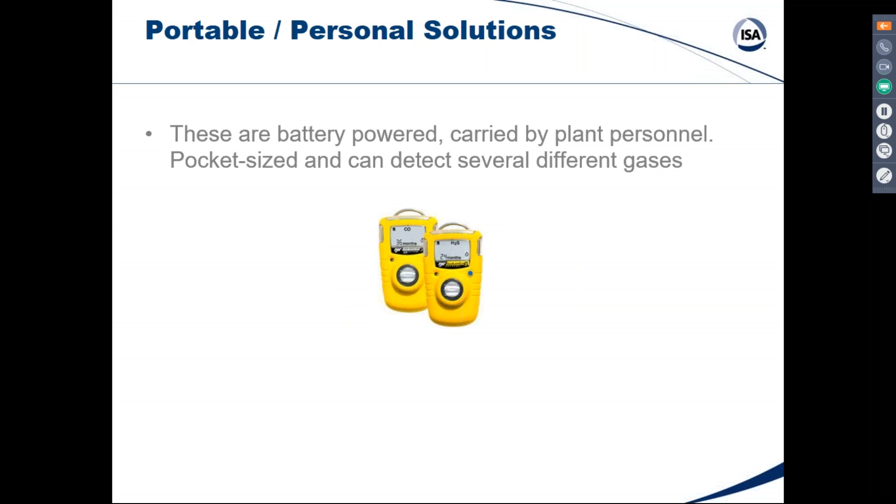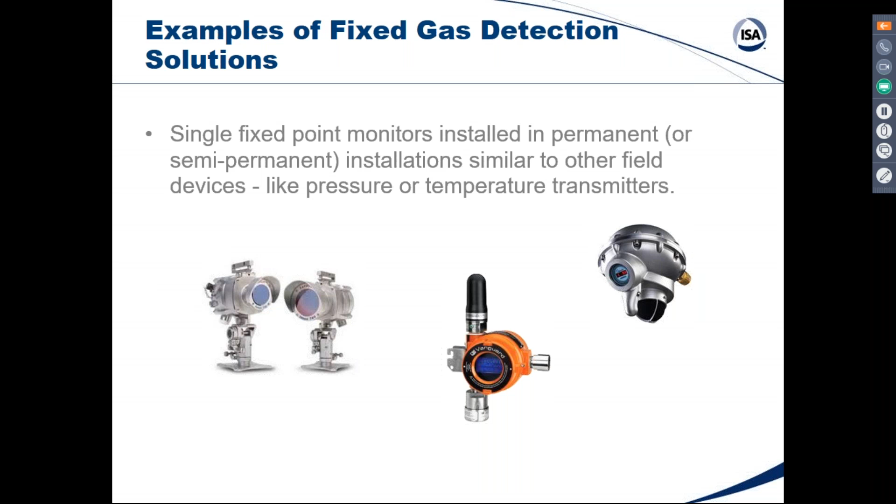Some examples of fixed gas detection, which is what we're going to focus on, are shown here. So single point fixed monitors are usually installed in permanent or semi-permanent locations. And like the existing pressure and temperature transmitters, they have a single purpose to measure a process variable, very local to where they're mounted. Here's an example of an open path detector, which is designed, unlike the fixed point, to cover a wider area. But by that nature, it's not as effective at point gas detection. And of course, the gas concentrations that it's detecting can be affected greatly by the environment, including weather conditions.

Ultrasonic gas detectors are designed to listen for gas leaks, usually mass kinds of events where there's a noise generated by the leak. And these detectors are really looking at the volume of that gas, not trying to get down to measuring the gas concentration. And these tend to be fairly expensive devices, and certainly more expensive than fixed gas detection.

All right, we'll get back to now the point detectors. So these are placed in areas where gas emissions are most likely to occur. There may be areas where there is wired gas detection present already. The gas has to come in contact with the sensor itself. So these are vertically oriented always. And that's an example of a point gas detector. And further, an example of a wireless one that's now come on the market.

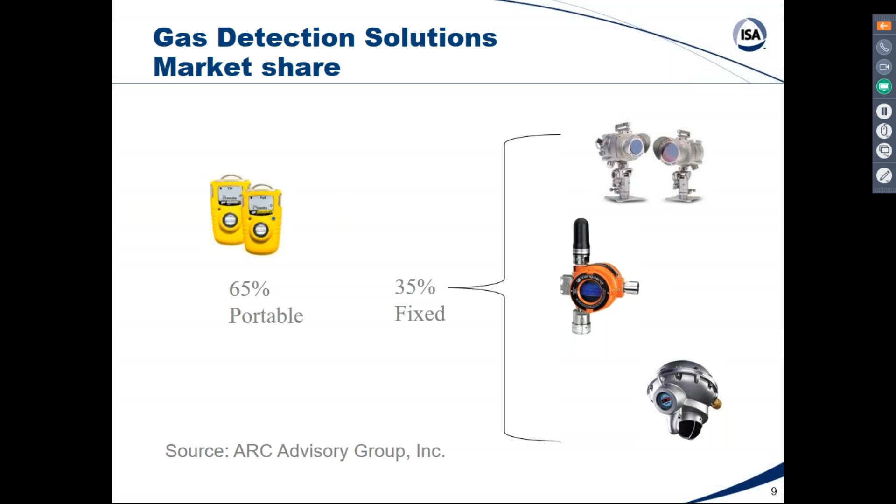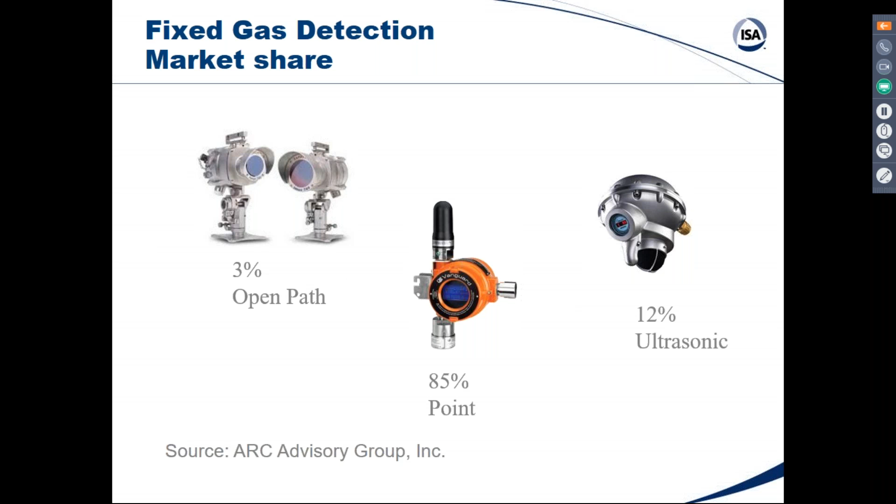So in terms of the market share, 65% are in this portable category, and about 35% make up the rest of those examples that we talked about. And breaking down the fixed gas detection market share, it's dominated by the fixed point gas detectors in this class, 12% in this ultrasonic area, and 3% of the open path type. And as it is now, only fixed point gas detection is available in this wireless type of configuration. The others, well, they're all power-hungry devices, but certainly the fixed point gas detector is less power-hungry, shall we say, than the other examples that I gave. And as such, it lends itself to a wireless solution, battery operated.

I'm sorry, I'm stepping in front of you.

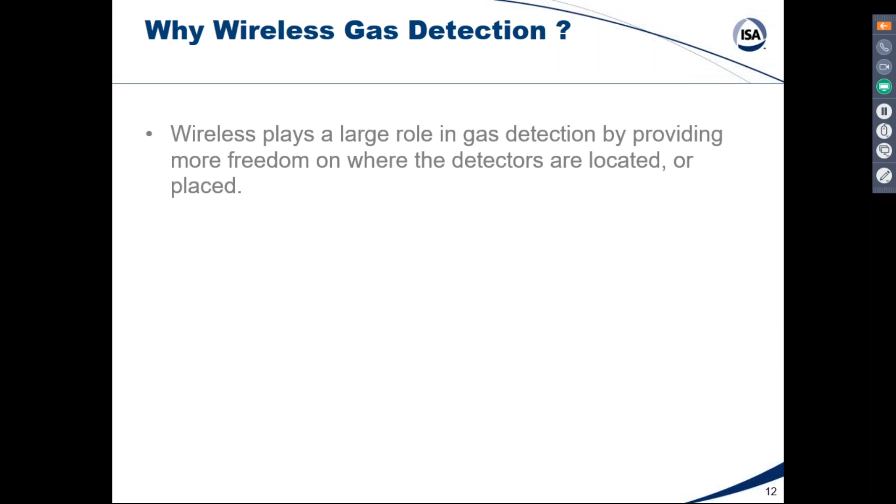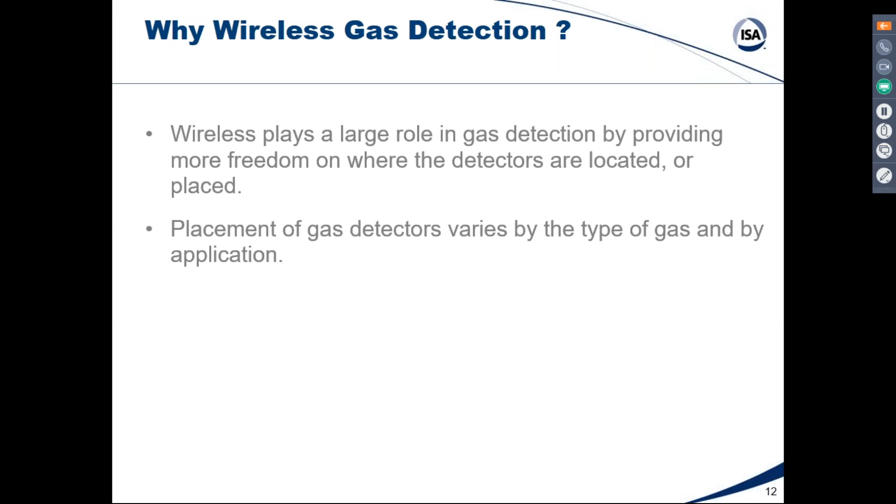So here's a question: why wireless, right? Wireless plays a large role in providing that freedom to locate a detector in oftentimes a hard-to-reach place or an inaccessible location. Of course, the placement varies by the type of gas. It also varies by the application, which is to say, is it an area where there's a high risk to personnel, or is it more likely to be an area where there's a larger risk of explosion?

What are we dealing with? We're dealing with methane, for example, CH4, that's lighter than air and tends to collect at higher locations, right? So you can imagine the ceiling of a garage where a CNG vehicle may be operating, just as a real-life example. Enclosed spaces become high-risk locations where there may be methane present.

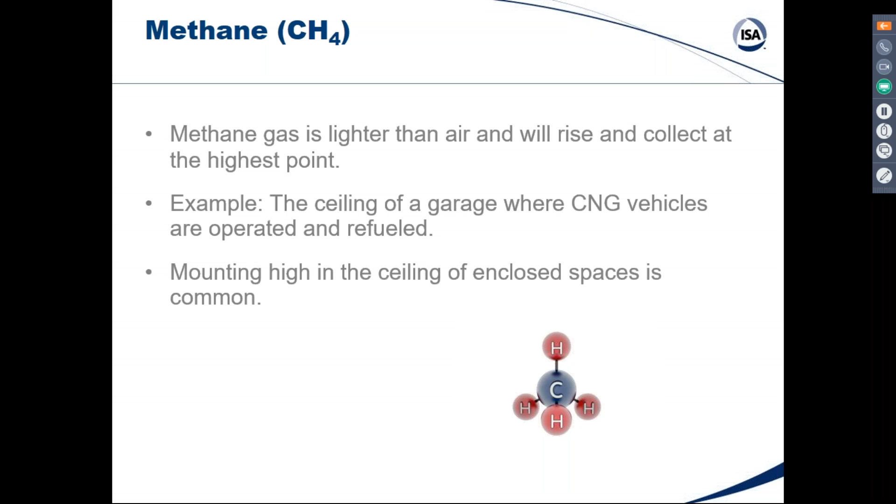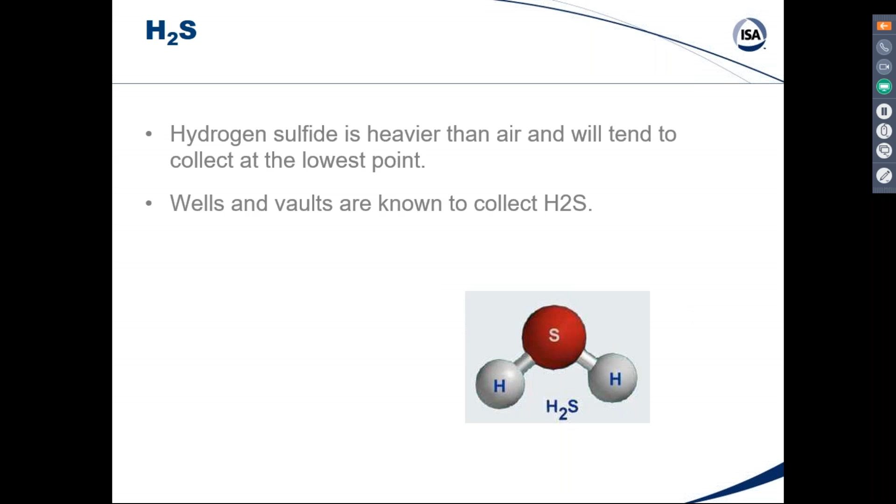And the other biggie is H2S, right? Hydrogen sulfide is heavier, in contrast, than air, and will collect down in lower areas. And this is dangerous, right? Because it lurks around, it can move around depending on the weather conditions and the air flow. Wells and vaults are one of the areas where H2S collects.

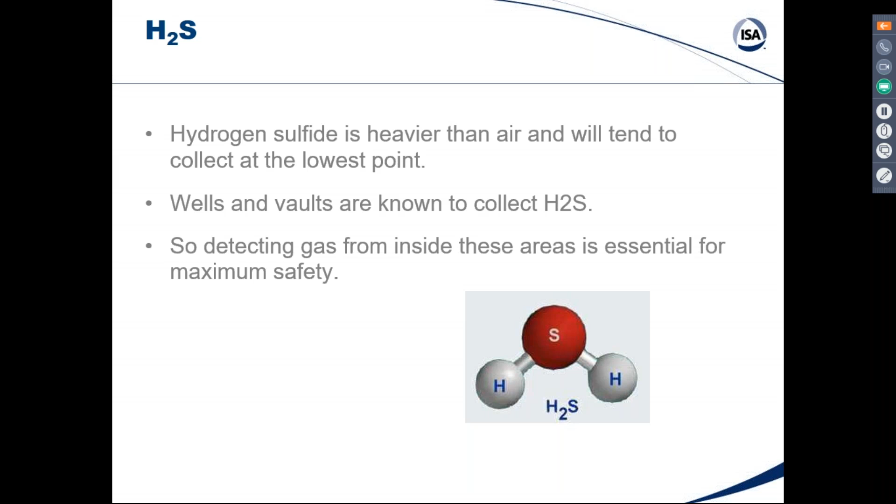So detecting gas from inside those enclosed areas is essential so that an operator, a maintenance person doesn't walk into the space unaware, because it can be fatal very quickly. Analyzer housings would be one example of that, and we'll get back to that in a little bit.

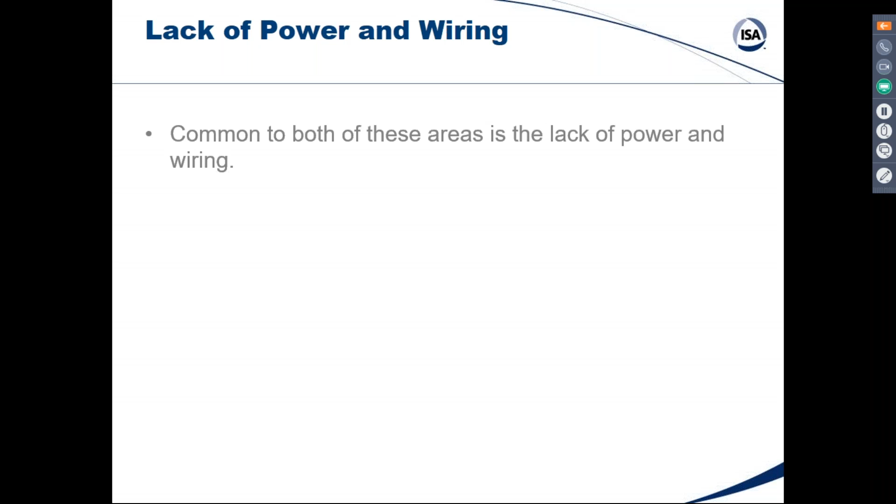So the issue that has plagued wireless gas detection, right, is this lack of power and wiring. These field devices have to transmit their measured value to a host system, a monitoring station, and it's accomplished easier with pressure, level, temperature, because the sensors tend to be a little more forgiving in terms of battery or power consumption.

And so the big trip point for wireless gas detection has been how do you power it in a way that makes it practical to deploy for periods of time, because you don't want maintenance folks having to change batteries, right, every 3 months. That's a big cost. It's a big total cost that goes beyond just the cost of the battery.

So we did a lot of research in this area, drawing on outfits like the FieldComm Group and this outfit called Berg Insight. ARC was another company that supplied us data. What they say is that WirelessHART is one of 5 of these global standards. And I've got a list of the others, Zigbee being one, ISA 100 being another.

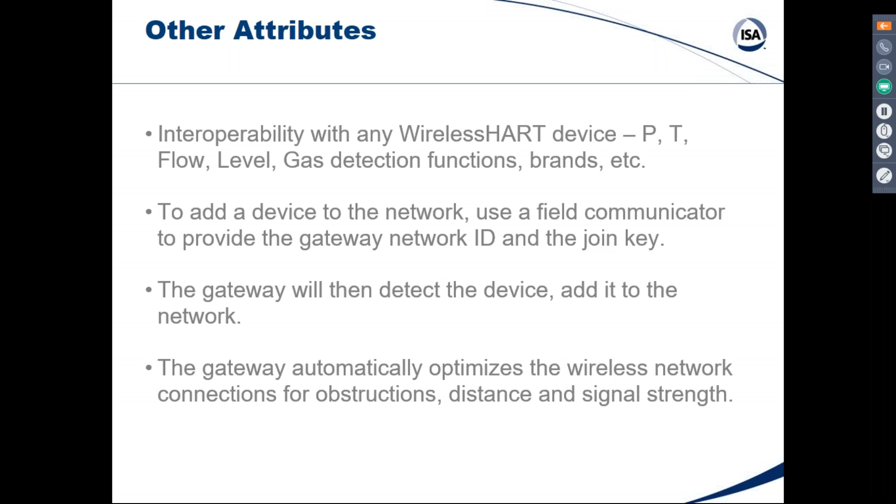So a couple of footnotes, right? In heavily obstructed areas, signal distance can be affected. The point-to-point line of sight feature is about 800 feet. I mentioned the frequency hopping, a way of optimizing that path in the event of interference on one channel. It could be noise. And security is built in.

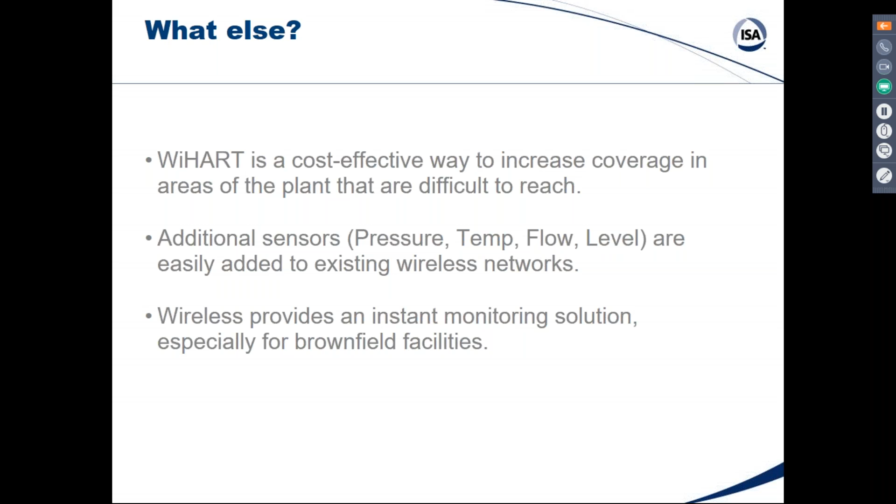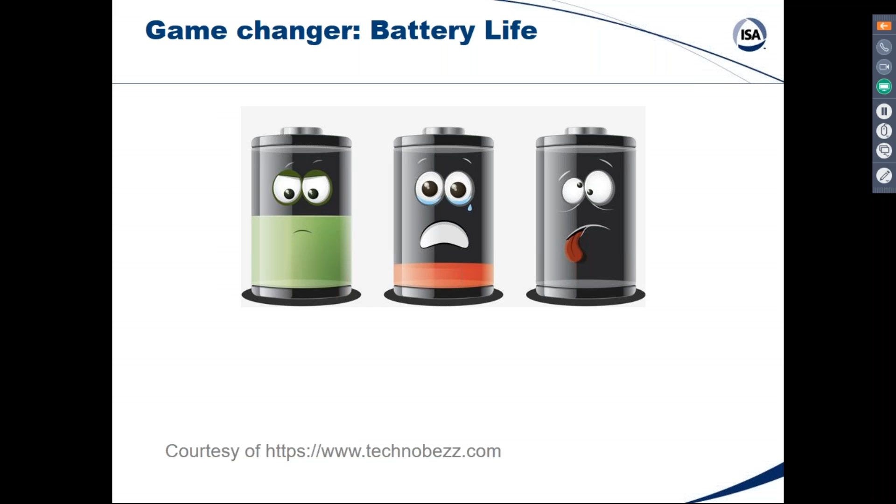Now, battery life has really been one of the trip points, right, for wireless HART gas detection. And we've changed that game, or vendors have changed that game, by breaking through this barrier of short battery life. And I can't go into the details of how vendors do it. I know how we did it. It's proprietary technology that actually some of our earlier products have taken care of as well. The idea of being able to use so little power to get functionality out of a device like a pressure transmitter or a temperature transmitter.

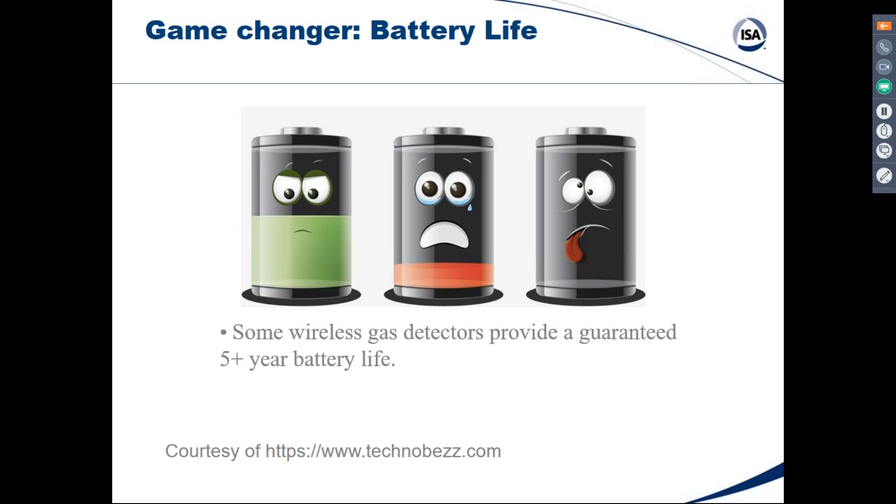And so in summary, we've come from proprietary to open systems. We've come from a situation where there was a fairly costly initial investment in wireless infrastructure to being able to take advantage of existing wireless infrastructure. Come from limited battery life to 5-year battery life that's warranted. Devices with limited diagnostics to expanded diagnostics, a long deployment period to shorter deployment, a steep learning curve to a more forgiving understanding of all of this and using the available expertise to take advantage of these solutions.

And finally, from a system that was somewhat difficult to maintain to an easier way of maintaining it, simply because we've advanced in terms of what we understand. The operators have advanced in terms of what they understand about design considerations and in wireless networks, pinch points and battery life and things like that.

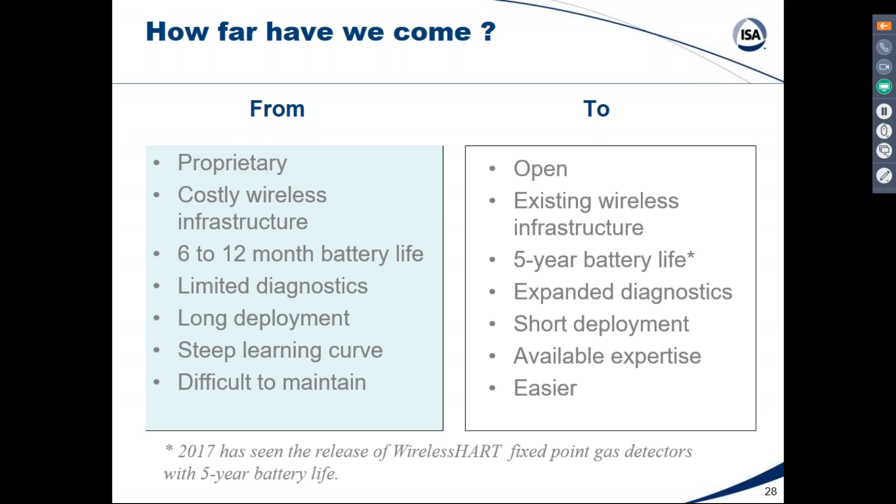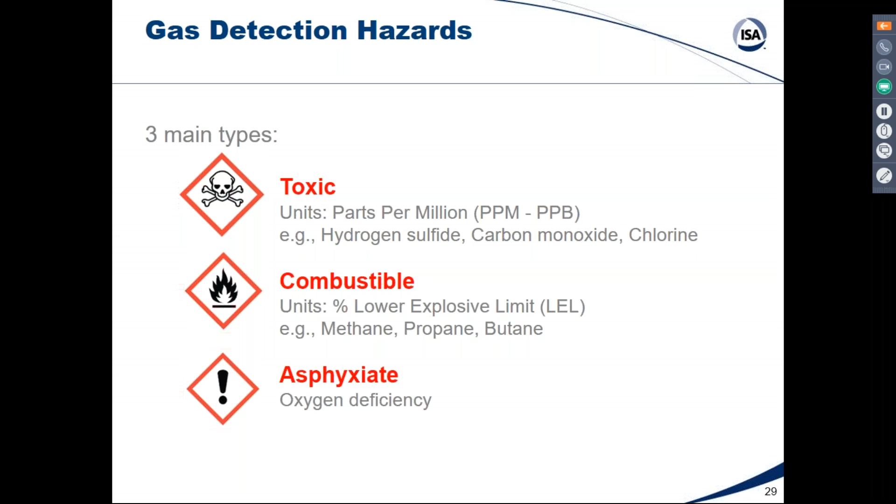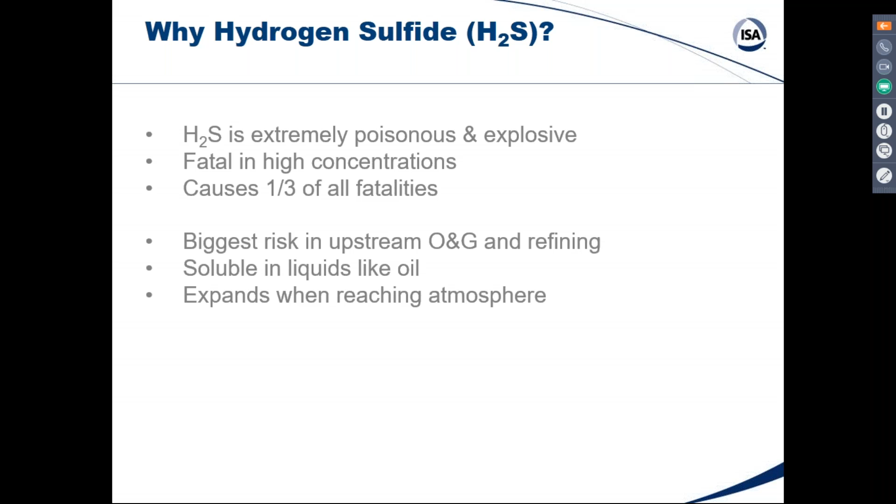So we looked at which gases to roll out sensors for first, and our research said hydrogen sulfide, because it accounts for so many fatalities. It's fatal in high concentrations. It can be fairly low concentrations. I mean, the alarms that majors set oftentimes for hydrogen sulfide are down in the 10 ppm area. It's a big risk in upstream oil and gas because H2S is soluble in oil.

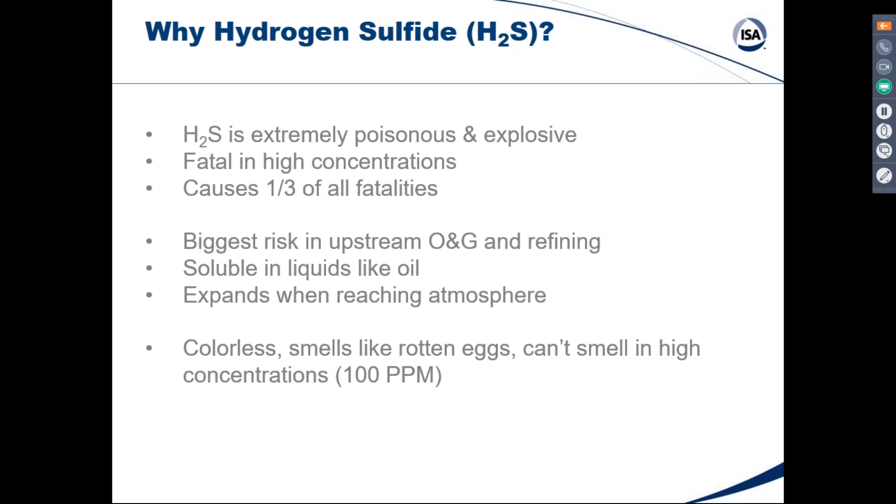And it's colorless. It smells like rotten eggs in low concentrations, and then by the time those concentrations increase to the point where they become fatal quite quickly, your sensing abilities diminish significantly. The olfactory mechanisms in the human get compromised very quickly at higher levels of H2S. And by the time that happens, it's too late.

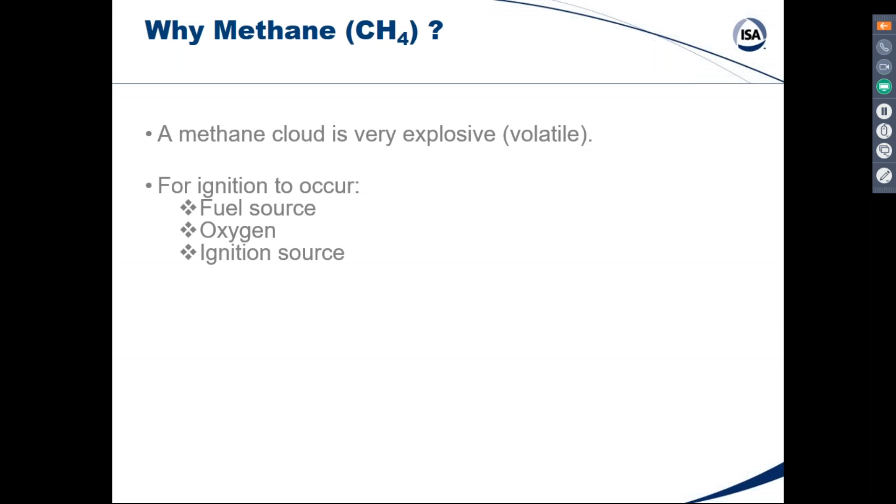Methane, there are examples on the internet of methane cloud explosions. They're all over YouTube. All you need is an ignition source and oxygen. And when we researched which gases really to attack first, it was these two, hydrogen sulfide and methane, making up a large percentage of the problem.

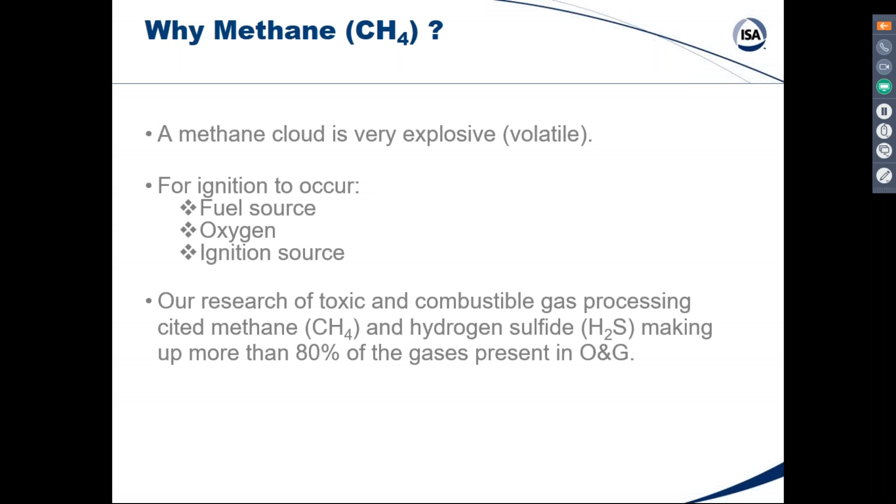Again, this is sort of centric maybe to the oil and gas space, and there are other of course risks that exist in chemical mostly. Some of the pervasive problems: the costliness of installing wired detectors, the fact that infrastructure is sort of maxed out in many locations, can't be expanded. It can take months to trench and to lay conduit and to install panels and all those things associated with wired hardware.

The proprietary wireless has been sort of pushed to the side somewhat by these open standards, at least among major operators. They don't want to deal with proprietary systems. The meeting I had last week, for example, that was the first thing they said: we won't look at any proprietary protocols in terms of wireless. The unavailability of line power.

Other customer problems that we've uncovered: personal detectors sometimes aren't accurate. They alarm locally, but not remotely, oftentimes. And in those situations, by the time you can get help to the guy that's fallen down, it's too late. They're worn by individuals, of course, so the detection happens where the human is present. And that is not everywhere all the time. So a lot of the infrastructure can't be covered with a personal detector.

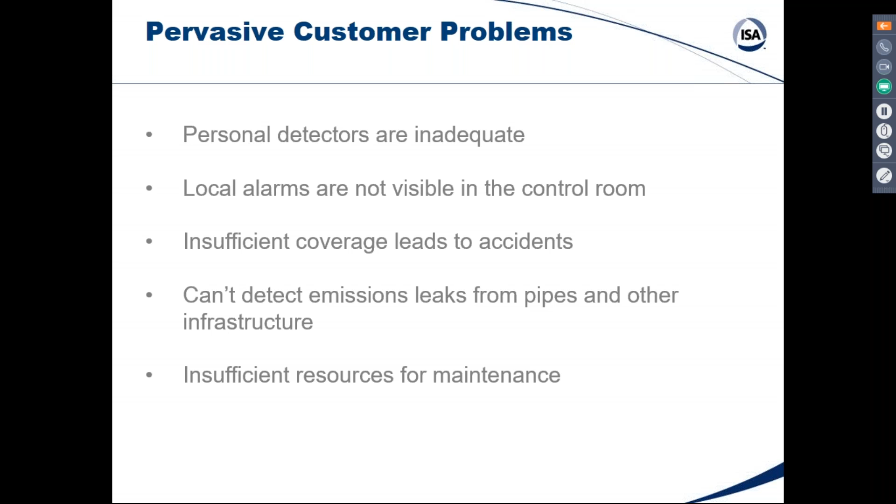Any questions before we keep pressing on here? I'm more than halfway through. Yep.

I don't believe there are any wireless HART personal detectors. No, they're all proprietary systems. Does anyone else know the answer to that? I know that there are no wireless HART. Again, there may be limitations in terms of what goes in. Right. I wouldn't disclaim that it's not possible, but I don't think the technology is there to take a personal. Because wireless HART requires a whole bunch of other things, the security encryption. So it takes more software than a personal detector.

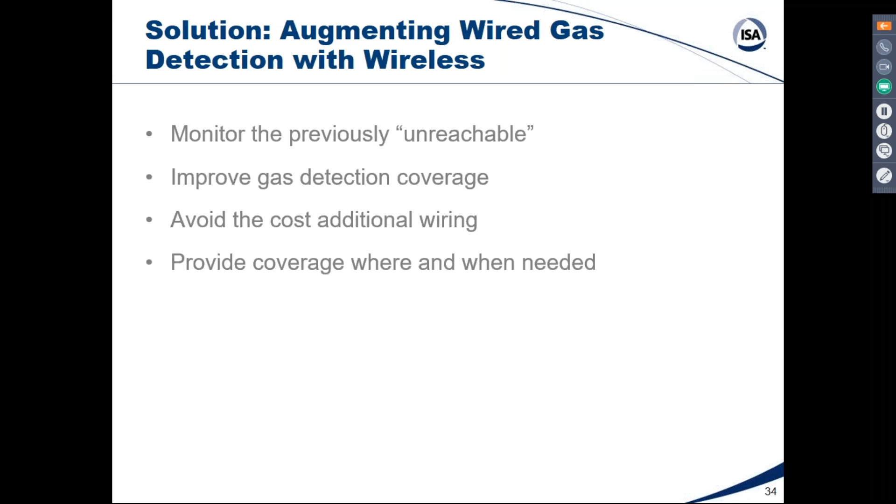Some of the places of where and why: storage tanks, piping, rotating equipment, perimeter fences, wellhead, enclosed spaces, vaults. The reasons that we mentioned: avoiding the cost of pulling wire, line power, or designing and installing additional wiring, conduit, cabinets, etc. And this time constraint is a big one. Not enough time available in the day to contemplate a lot of additional wired gas detection.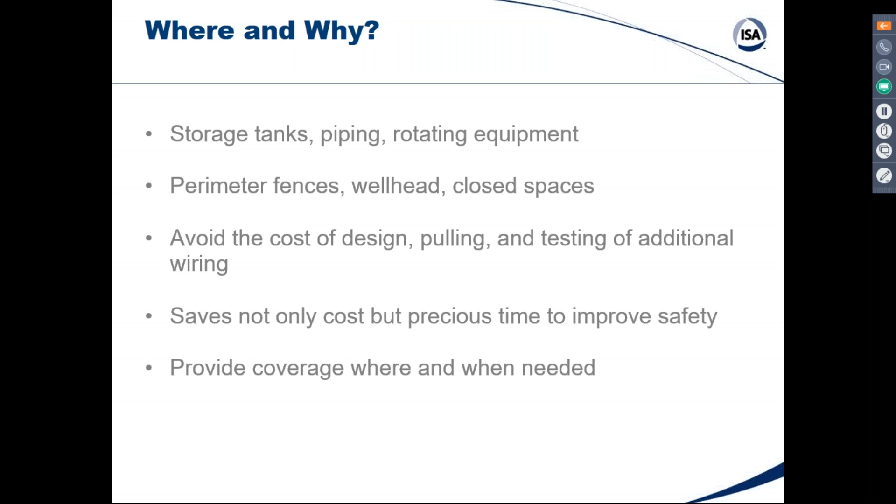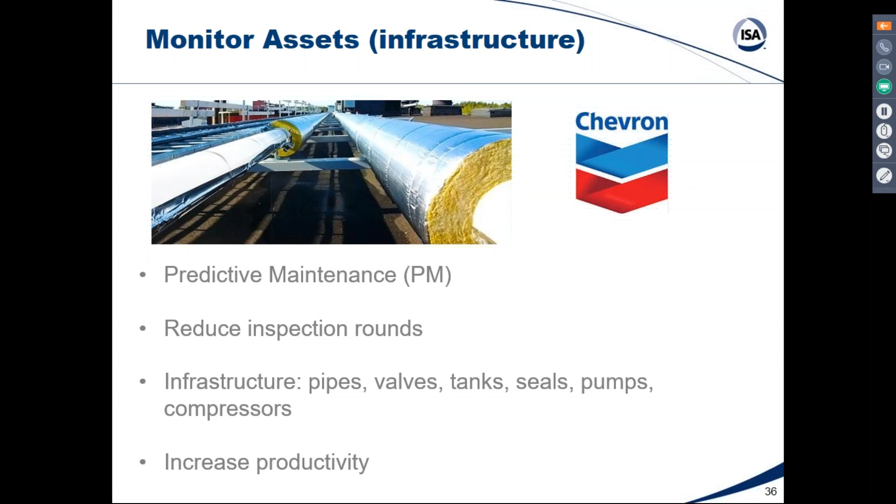Chevron really informed the design of this product here. It was for fence line monitoring, and in the predictive maintenance area. Our collaboration early on, which is related in that white paper, had to do with a concern in a fairly remote location across a highway from the production facility. Storage and fence line; they wanted to reduce the number of inspection rounds. They wanted to cover pipes, valves, tanks, compressors. So they were looking for expanding the monitoring in an effort to increase productivity.

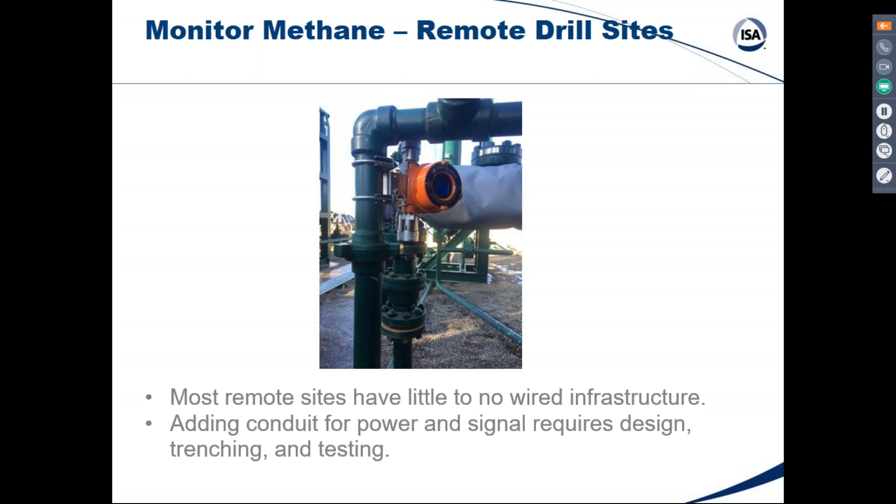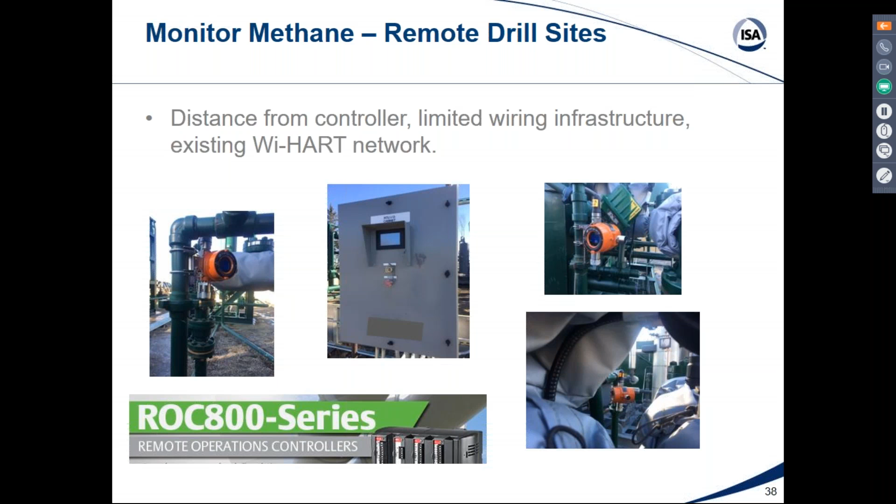Here's an example of one of the earlier deployments, a remote drill site where there's little wired infrastructure and no possibility for adding power, no desire to add power and get into the trenching, and in this case there was distance between the controller and the piping. There was an existing WirelessHART network and a SCADA system that allowed this interface. This is the essential architecture: gas detector, the ROC 800 gateway, the central control. So this, in this case, became the gateway for the network.

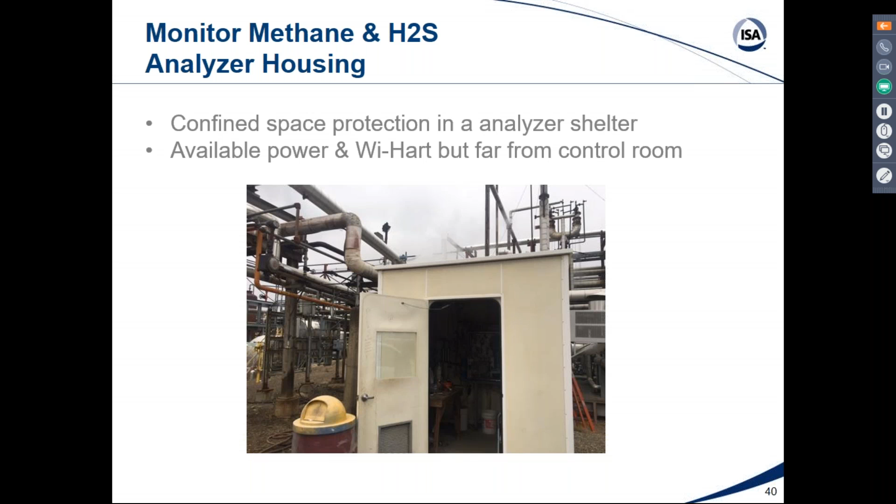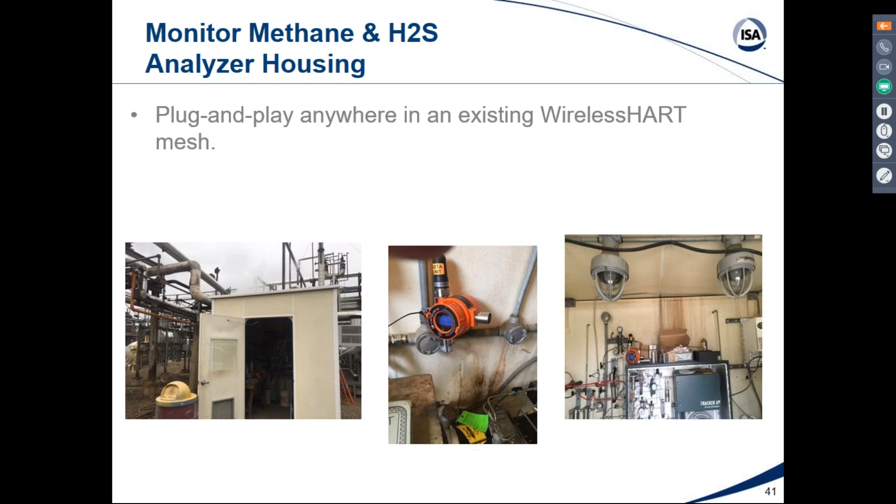Here's another application: analyzer housings. These temporary confined spaces where there's analyzing going on, sampling going on, and there may be available power and a HART gateway, but some distance from the control room. You go inside the building, and you can see the one device up there, and then a closer look there. Here is a coke refinery that's using a wireless HART gas detector to detect H2S.

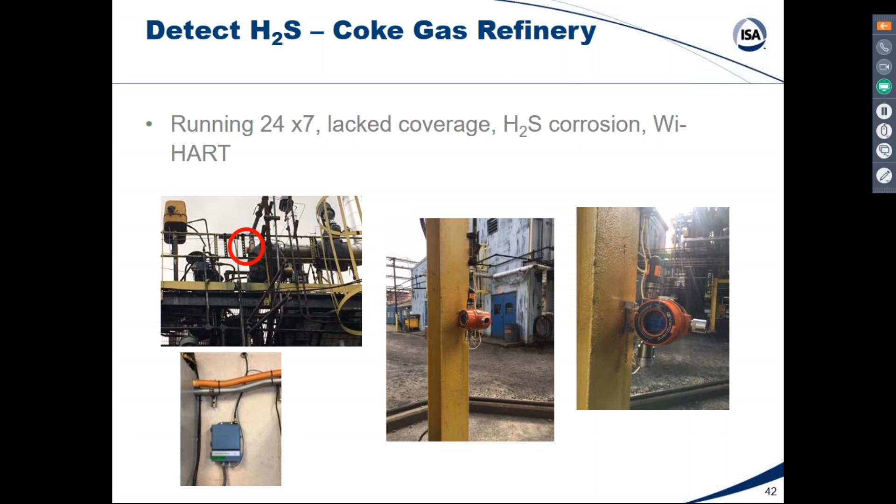This is what I'm talking about, of course, with the trenching that's required to expand this coverage. It's exceedingly costly.

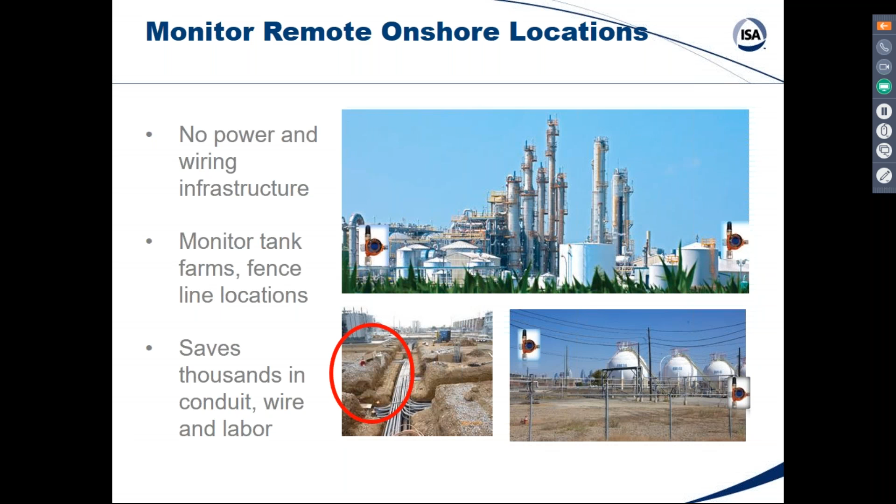The temporary work area is a good application. And so that gets to the question of how do you design this so that it can be mounted quickly and in a temporary situation. And so vendors have developed these quick mount brackets, these stands that can be moved around. So if you've got temporary work going on, there's a way of expanding coverage very quickly and optimizing that coverage by moving devices around.

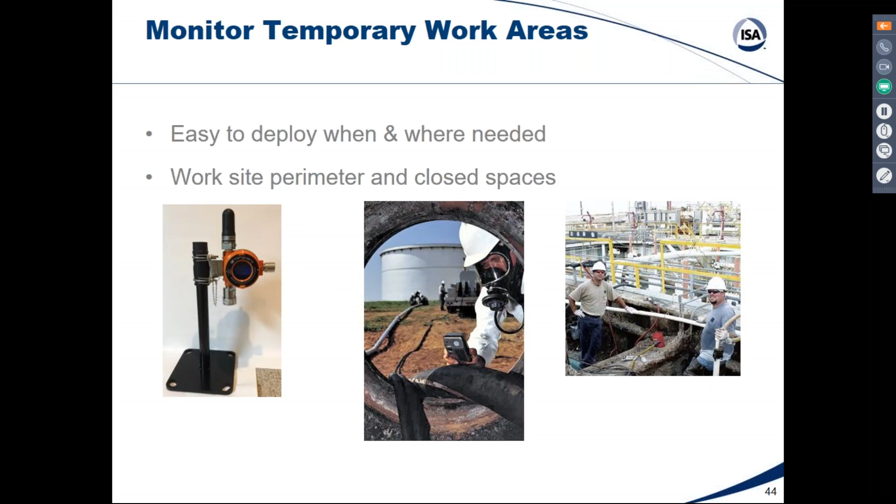This was an early application with this Aliso Canyon blowout in Southern California. Massive disaster. And now the California regulatory authorities are saying, well, we don't really care much what the EPA is doing. We're going to implement these regulatory standards for methane detection statewide. And so this is one of the early deployments of a wireless HART gas detector in this area.

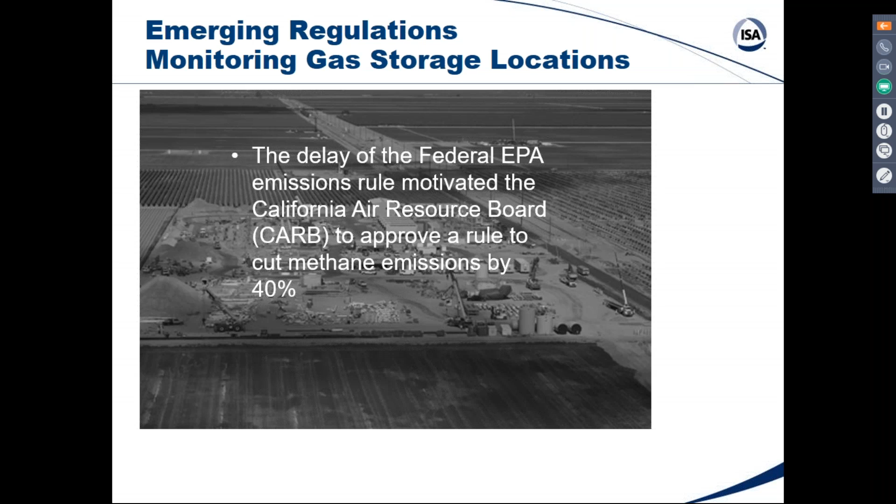Another California company, the Southern company, called Central Valley Gas, has these Christmas trees, where they are installing wireless HART gas detectors in this sort of surround 4-point configuration and monitoring levels so that they can optimize the location of the gas detection. They may remain with 4, or they may be able to cut it down to 2, perhaps. This is ongoing right now.

They brought in a company that has this infrared camera that can really get quite a resolved view of the plume, and that, of course, helps inform location placement. So this is a gas detector and Emerson gateway, and then this Modbus input to a laptop right there on site so they can monitor.

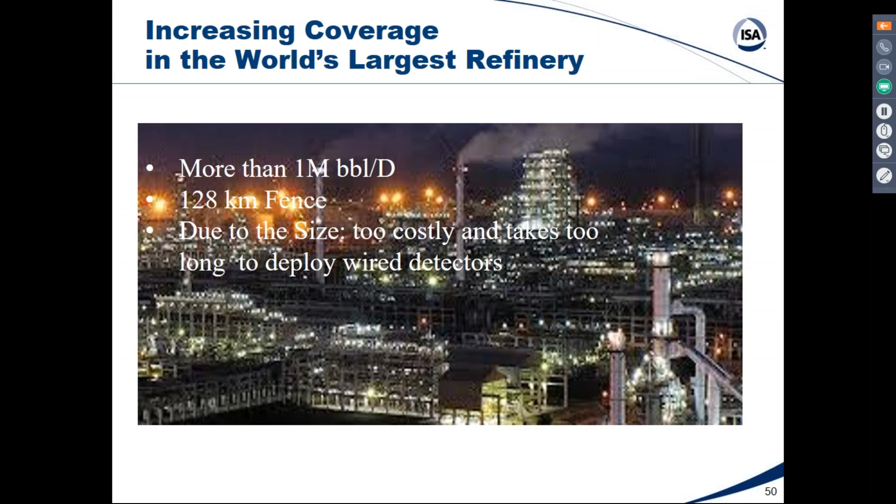This is the world's largest refinery in India. The fence line is 80 miles long. And you can imagine the challenge of trying to protect a facility like this. So we're over and talking to those folks. They've been an earlier adopter of some of our other products, not gas detection, and so I think we're going to see a lot of business out of this. This is Reliance. They are looking at it as a complement also to their fire and gas system.

So you have a fire and gas architecture in place. You probably have wired gas detection supplying analog 4 to 20s into the fire and gas control system, talking to the host system. And now the question is, can you expand coverage and add some additional redundancy? This issue of diversity of technology gets talked a lot about in SIL applications and safety instrumented systems. How do you reduce the risk of common cause? And of course, diversity is one of those areas that is promoted as one of those design considerations for reducing common cause. Is it done in practice? Sometimes, but not often.

And this, in my view, presents a great opportunity for adding diversity to a system like a fire and gas system, where the only safety variable output, as we talked about a month ago, would be the analog input to the fire and gas system. But this can serve as that redundant check, that informative measured value, that comparison. So it seems diversity is going to come of age, I think, with this deployment of wireless technology, where they may rely on the wired system as the primary safety variable output, but have other devices that can serve as redundant checks and maybe inform decision making before a trip is executed.

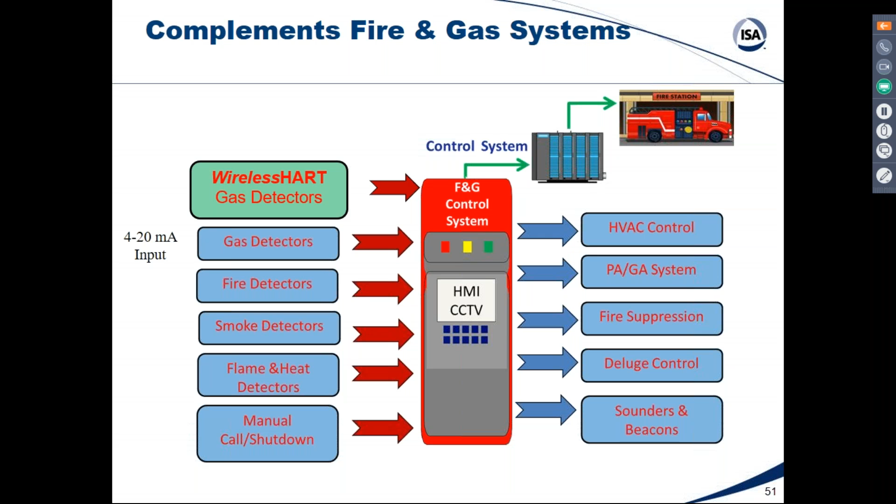This is going to be important in the upstream oil and gas production. As these wells get more efficient, they don't want a spurious trip taking the well down, right? I heard that from an operator recently. So how do you do it? Well, this is one way you could do it, by adding some redundancy that's diverse. Architecture: sensor, gateway, Modbus or Ethernet, DCS, alarm control, fire, first responder.